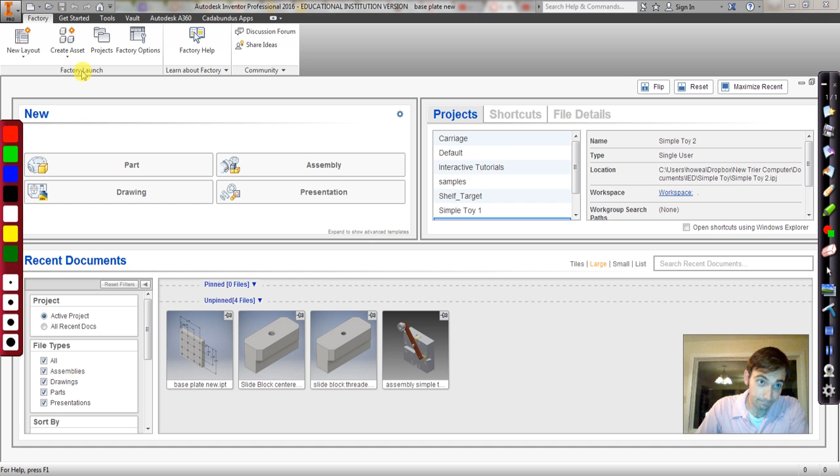Okay, now we want to make the assembly. It's exciting. We're going to click on New, and this time we're going to do standard.iam.

So this is a little bit different than maybe what we've seen. First thing we're going to do is place, which just means we're going to bring in a part. If you have your project set up right, it should take you right to your Simple Toy folder.

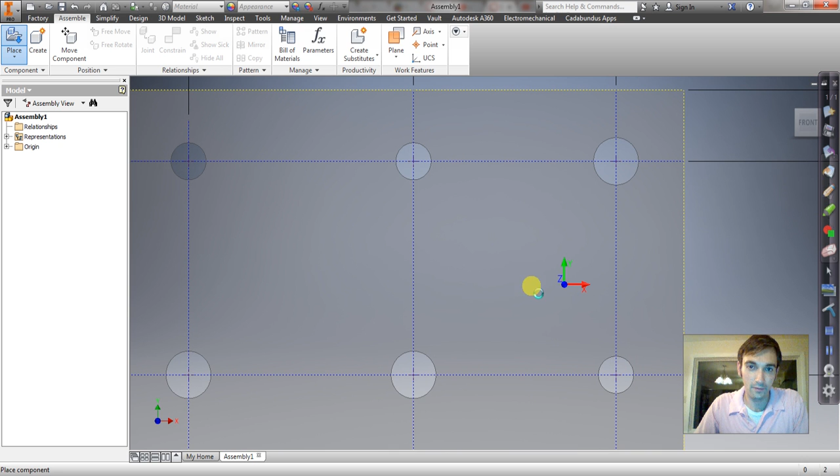First part I'm going to place is the base plate, because that's kind of like our base part. It's not going to move. So I'll say OK, click to place one part, then hit Escape. There we have our base plate.

Next thing we're going to do is place our corner guide blocks. So I'll say place corner guide block. I need 4 of these, so click, click, click, click, and then right click and say OK. Now we're going to use our mating conditions.

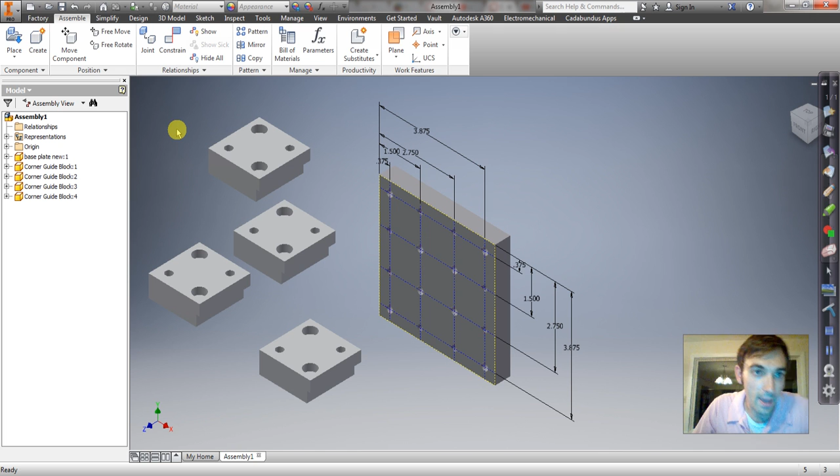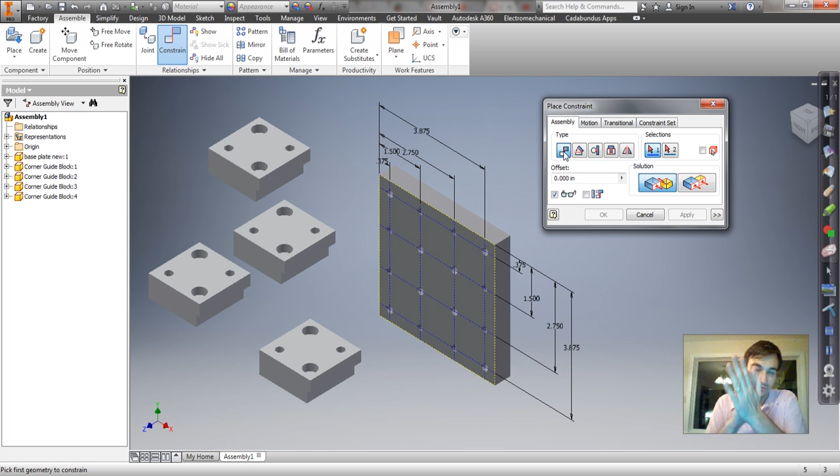So what you do is click on Constrain, not Joint - I actually don't know what Joint does. We're going to say Constraint, and then say Mate. Mate puts 2 surfaces together, so they can move any way they want as long as they're together.

Let's rotate a little bit. Click the base there and that surface there, and it'll put those 2 surfaces together. Then we can say Apply. Notice that this corner guide block can still move in all the other 2 dimensions, because it's still satisfying that mating condition.

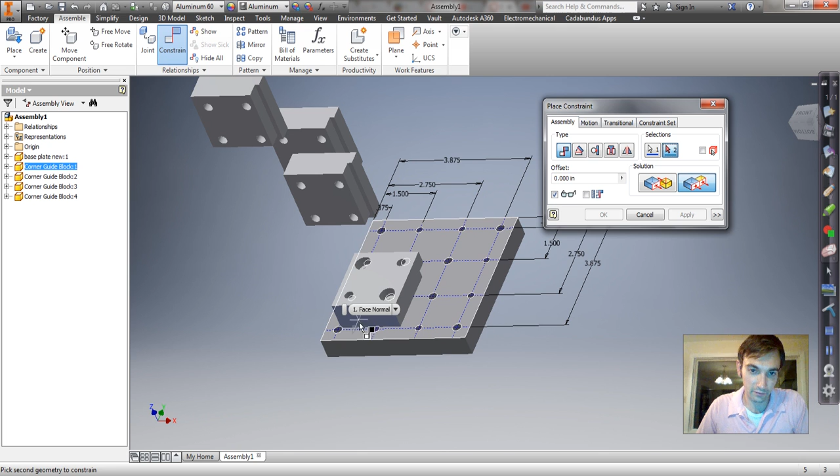So maybe we'll put this corner guide block right in this corner. The mating condition we can use is called Flush. It's still under the mate type of constraint, but it's called flush because it aligns 2 surfaces. So I'm going to align this surface and this surface, and then align this surface and this surface. So this one is now locked in place.

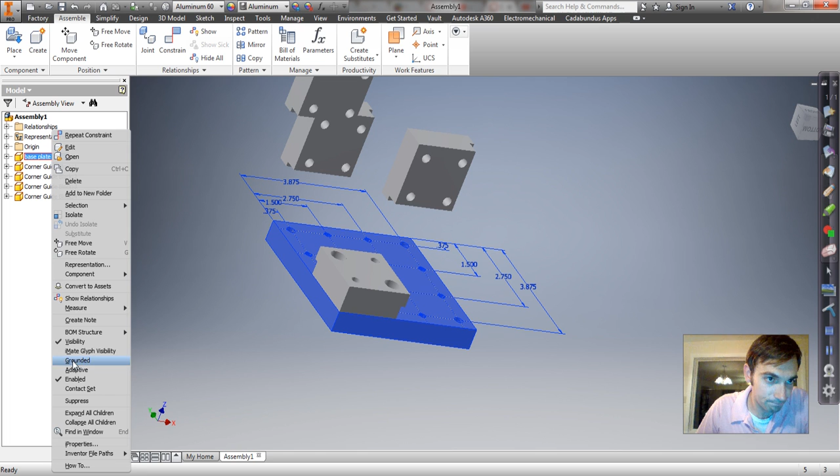By the way, I can right click on my base plate in the model viewer - in the model tree or something, it's late right now and I forget the name - and click Grounded. So that one's grounded, so it can't move. Now the base plate is grounded.

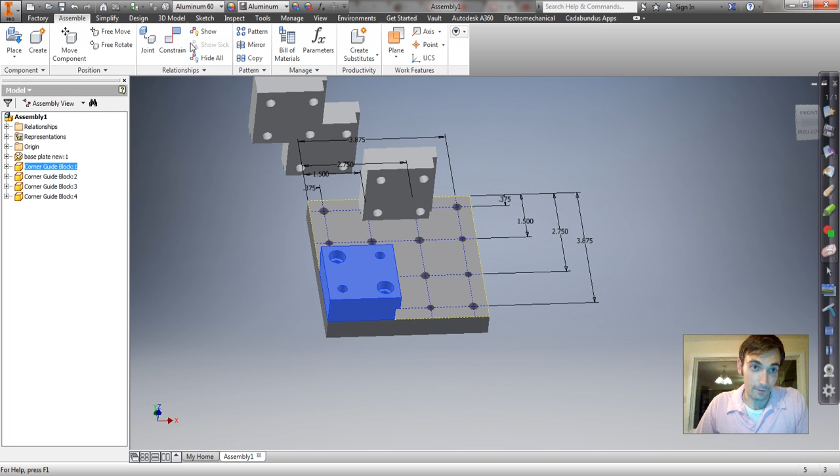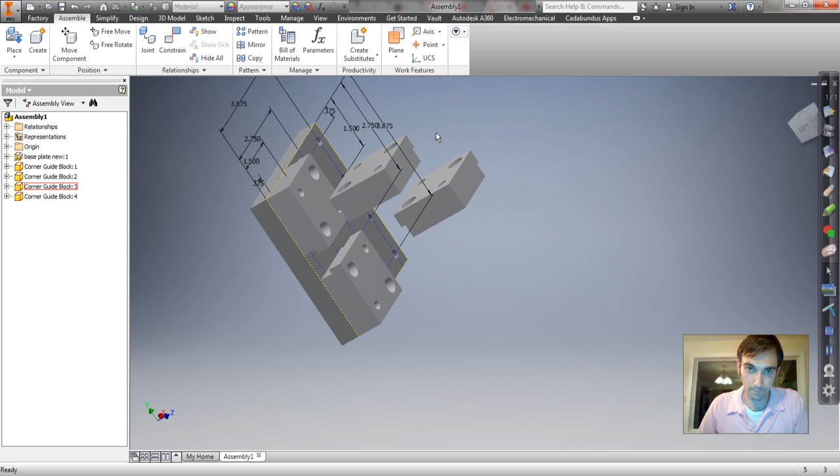So I'll just go through and do the rest of these now. Constrain, boom, boom. Maybe we'll put this one in that top corner. I'll apply that one. This may want to be to here and here. Apply. And then I want it to be from here to here and here. Apply. Done. Constrain the next one.

Put this one down. Apply. Make this face flush to, I think, that one. Make this face flush to that one. Good. Next thing we'll do, make that surface to that surface.

I made a mistake, need to cancel it. Make this one to that one. Then - whoops, sorry, I need to apply it first. Then I'm going to make flush.

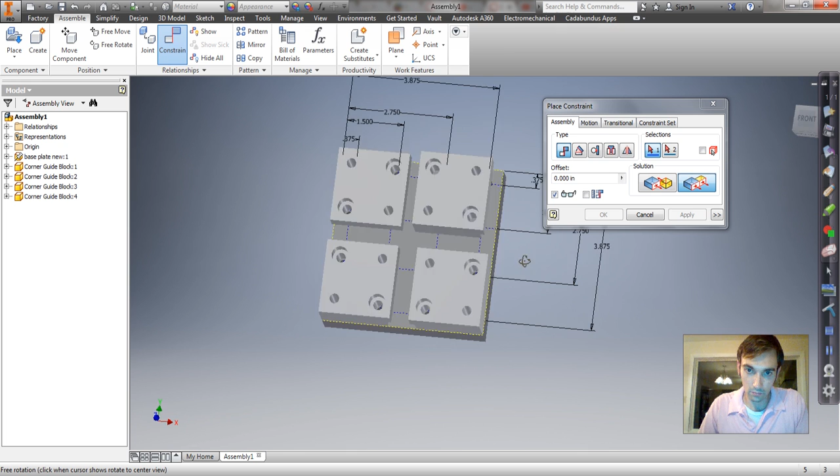Wait a minute now. I think I want to make this face flush to that face. Apply. And that face flush to that face. Apply. Good, we got the corner guide blocks in.

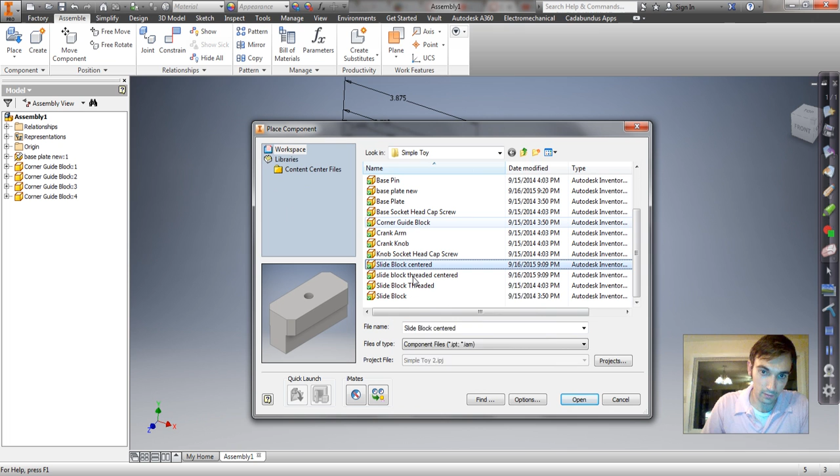Maybe next thing we'll do is the slide blocks. So we're going to go to Place, and then Slide Block. Okay, so since I want this one to be right in the middle, I'm going to activate a middle plane in the slide block and a middle plane in the base plate.

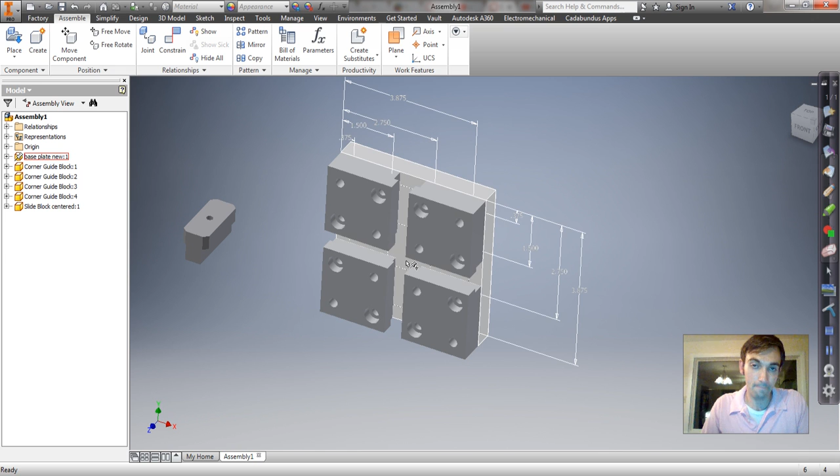How do we do that? I'm going to do the base plate first. So double click on the base plate, then click on Origin, and hover over these existing planes.

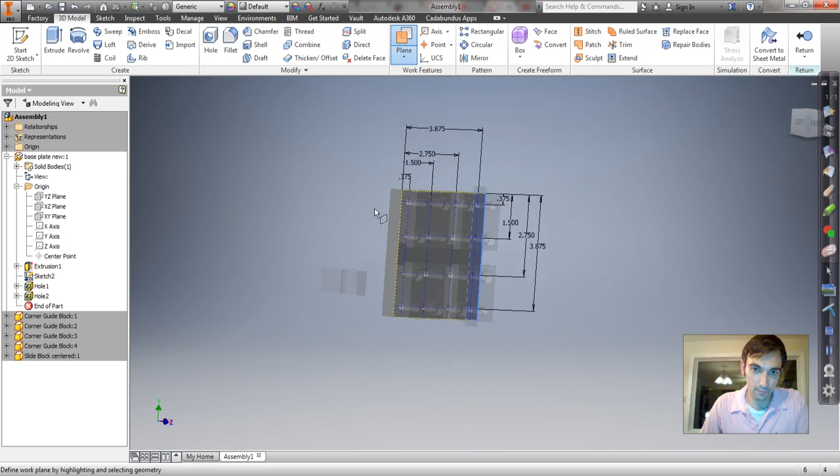There isn't a plane that goes right through the middle, unfortunately, but we can make one pretty easily. Click on plane, then click one side, and then the other side. That's going to place a plane right in the middle. While we're at it, let's go ahead and put one in the other middle.

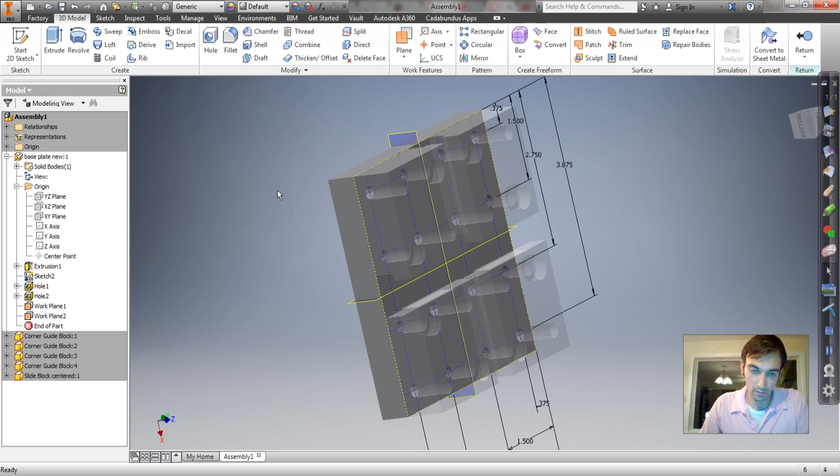Oops, gotta click plane again. Wait a minute, I'm having trouble - maybe that side was already selected. So now I have two planes that go through the middle and they're perpendicular to each other.

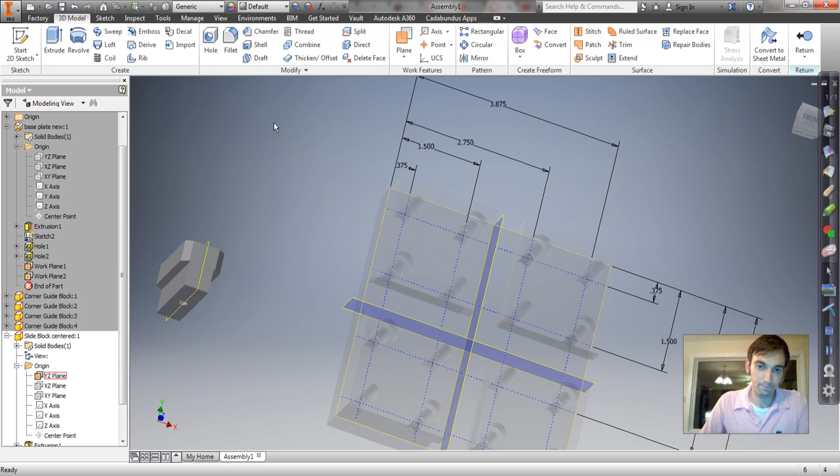Now I'm going to say return to go back to the assembly. Now I'm going to make a center plane in this part, the slide block. Double click that one, go to the origin in that one. Now I created this part in a way such that it already has the mid plane there, so I'm just going to right click on it and make it visible. Okay, now I can return back to the assembly.

I can constrain this mid plane to that mid plane. I think I actually clicked on a point by accident, so I'm just going to cancel and try again. That plane to that plane, and apply. And I'm going to put this face down on that face.

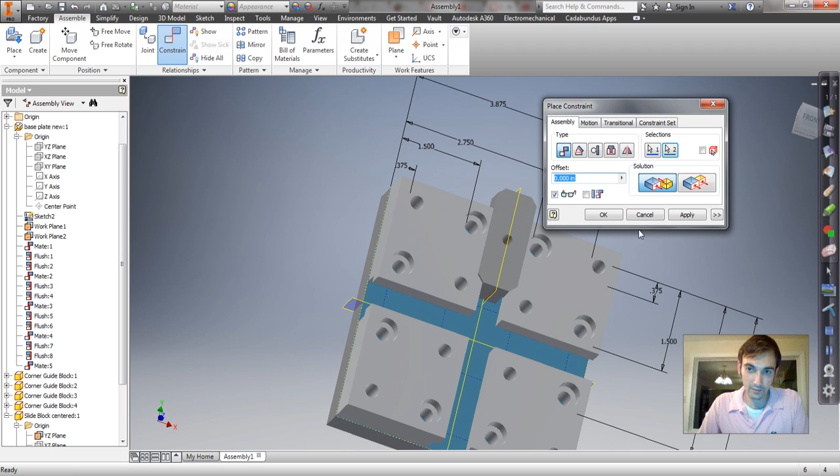Actually, it goes the other way, doesn't it? This is on the bottom. So it goes here, that goes on the bottom. And apply. Still want it to be able to move like that. So that one's actually finished.

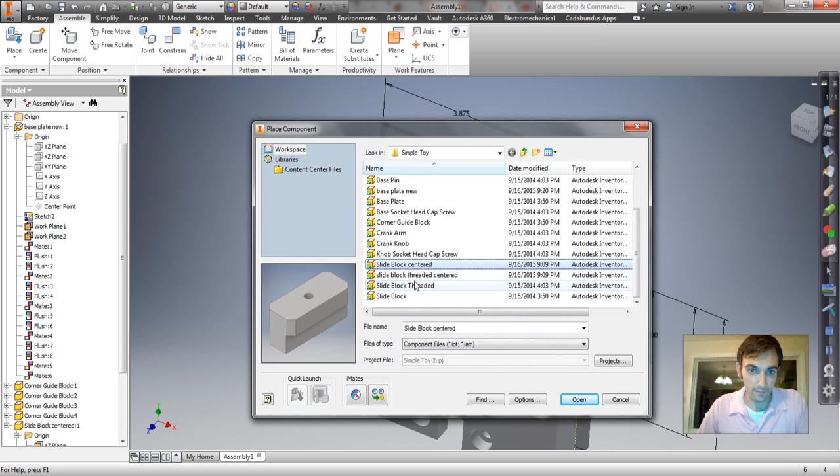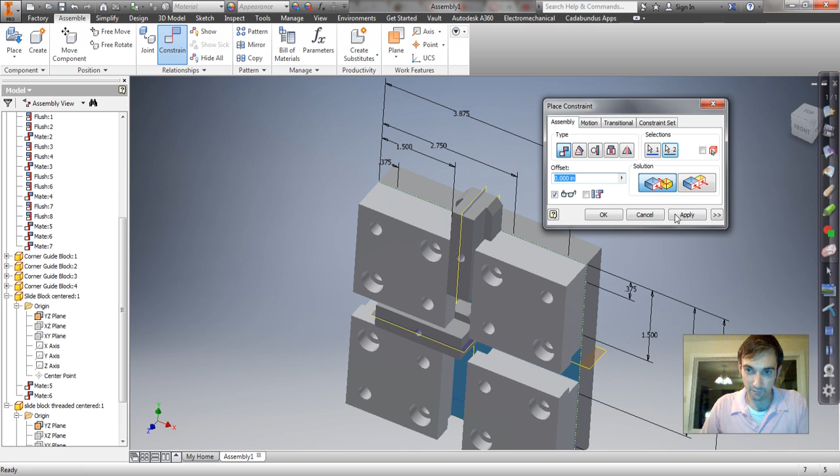Now we're going to put in the slide block threaded, which is the same procedure exactly. Double click on that part, make that center plane visible, go back to the assembly, click constrain, constrain that plane to this plane so that they're mated, and then constrain this face to that face so that they're mated. And now this one can move as well.

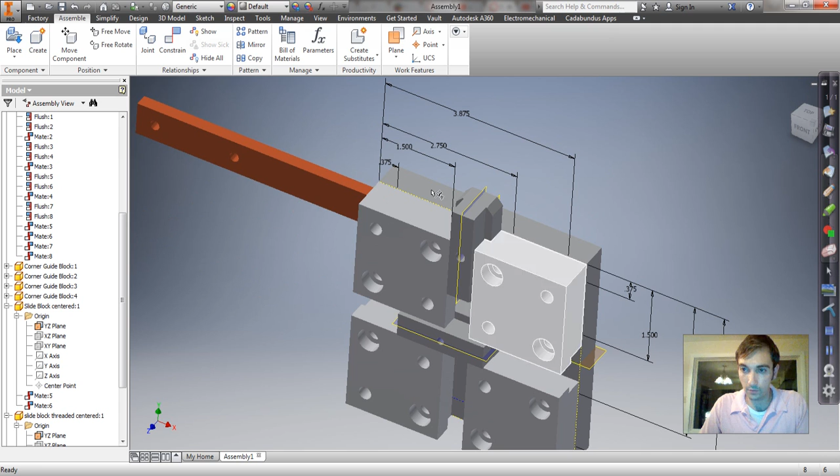Okay, next thing we want to do. Why don't we put the crank arm in? So what we're going to do is we're going to place the crank arm. Place it in the part. So now we're going to mate the crank arm to the top of one of these corner guide blocks. So mate, mate. There, it's on there.

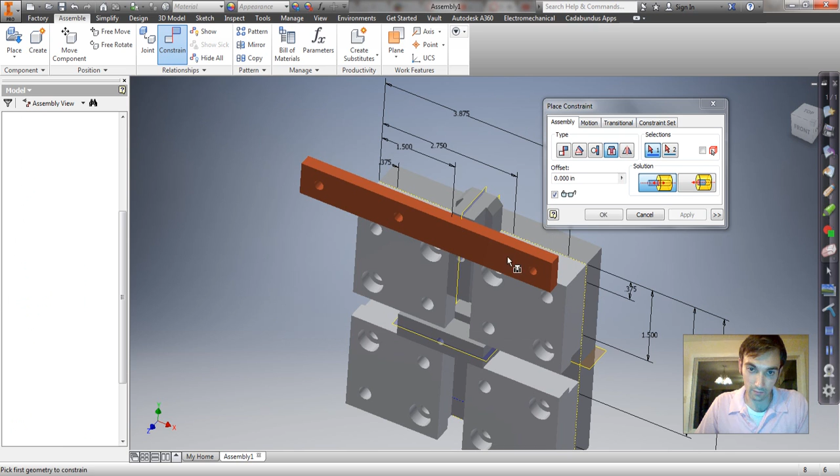I'm going to use a different mating condition called insert. If I click on the center of this hole and the center of this hole, hit apply, doesn't like it. Let me think about why that is. What I did was I picked the wrong side of the hole. So let's try that again. Go to insert. We're going to pick the bottom. You got to pick the bottom of that one and pick the top of this one. Okay. Do the same thing with the other one. Pick the bottom of it and then pick the top of it.

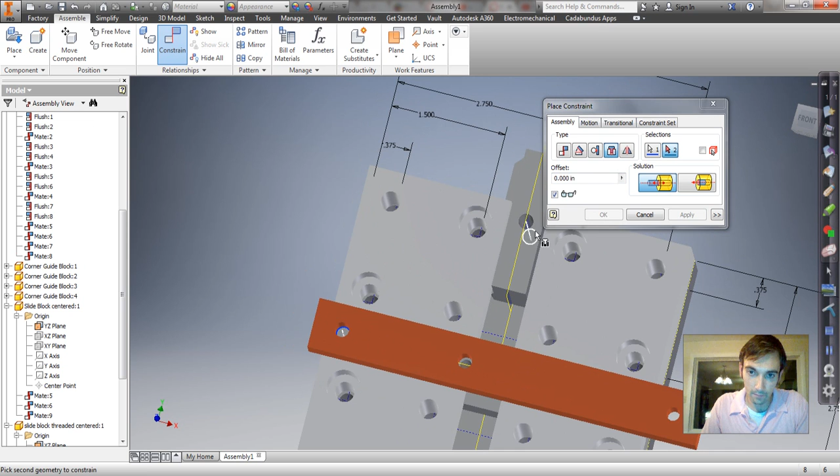Apply. Cancel. And now this is where it's kind of neat, is that they actually all move together. All the mating conditions are being solved for all those different points, and you actually get some movement, which is pretty neat.

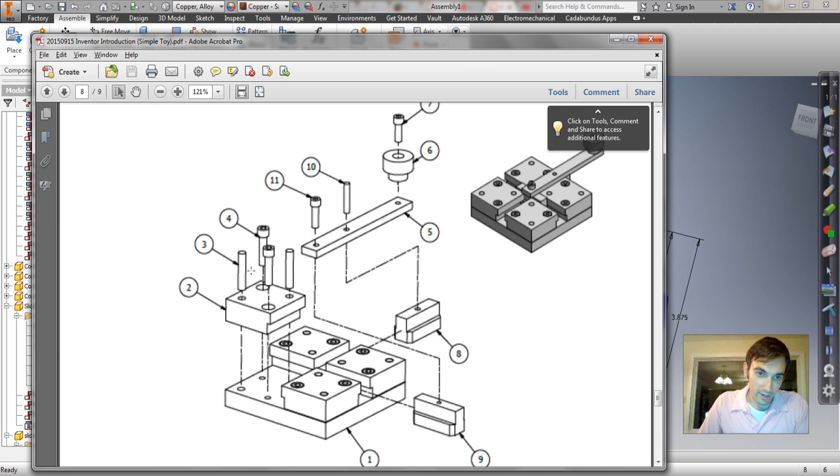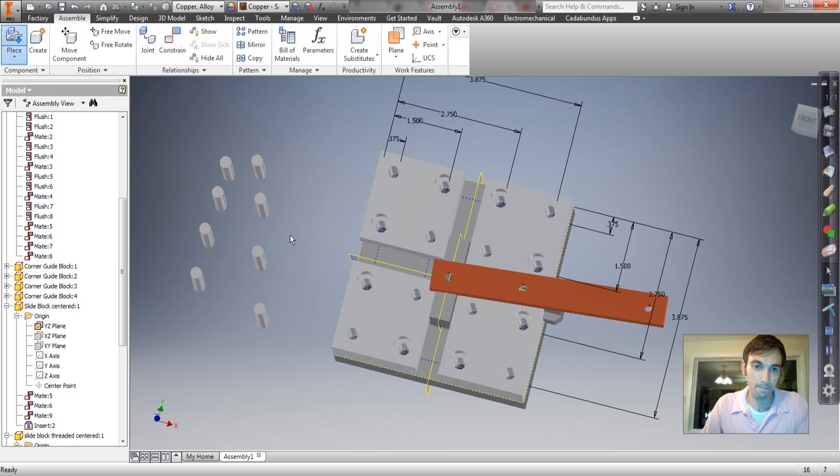Okay, now we're going to add the rest of these parts here. Let's go ahead and add these pins. So I'm looking on the assembly drawing, that's balloon 3, which is item 3, that's the base pin. So I'm going to go here, say place, base pin, and we have 1, 2, 3, 4, 5, 6, 7, 8 of them. Go to constrain. This is the same thing, insert. Just use insert. Boom, boom. Might have to flip it around.

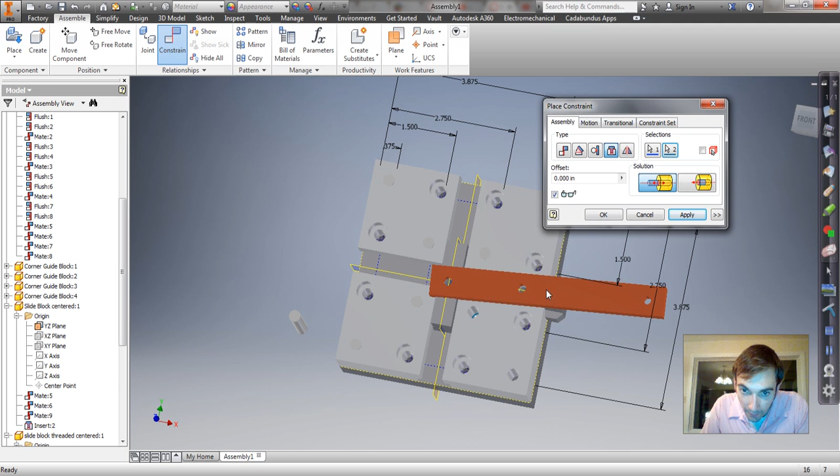Insert this one. That one actually went in fine. Insert the next one. Insert the next one. Just get all these in. Okay, that one I actually messed up, so I gotta try it again. Clicked the wrong side of the hole. So insert there to there, and insert there to there.

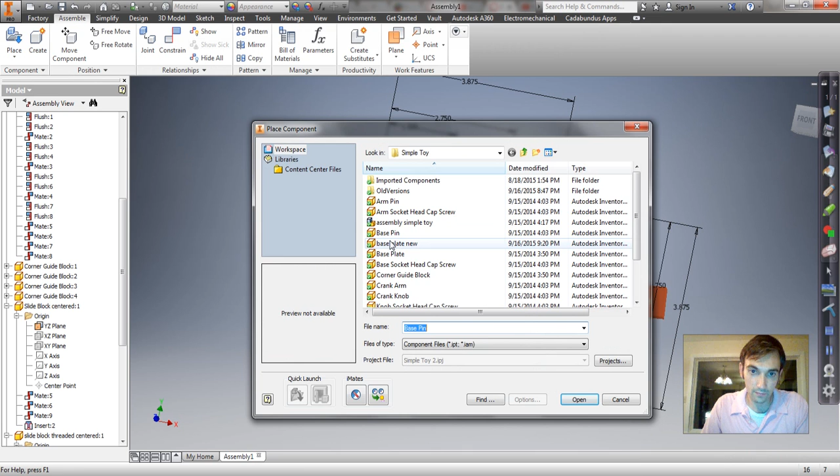Okay, let's put in balloon number 4, base socket head cap screw. So we're going to place the base socket head cap screw, and we need 8 of them. 1, 2, 3, 4, 5, 6, 7, 8. So we're going to use insert again. So constrain, insert, there to there. So it's important here now you're picking the bottom of the screw head and the bottom of the counter bore hole. Apply.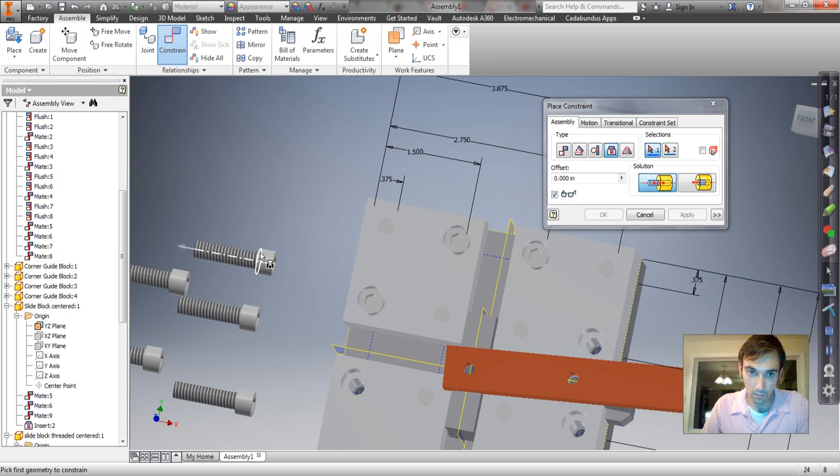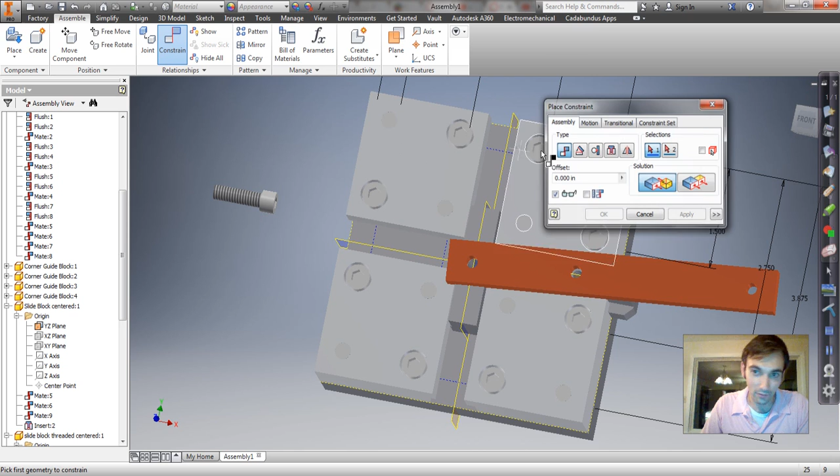Okay, good. Next thing we want to do is add in number 11. That's the arm socket head cap screw. It's a good name for it. Arm socket head cap screw. We just need one of those. Go to constrain. Insert the bottom of this one to the, which one was my slide block threaded? I forgot. It is the other one. So I'm going to go to insert right there. Apply.

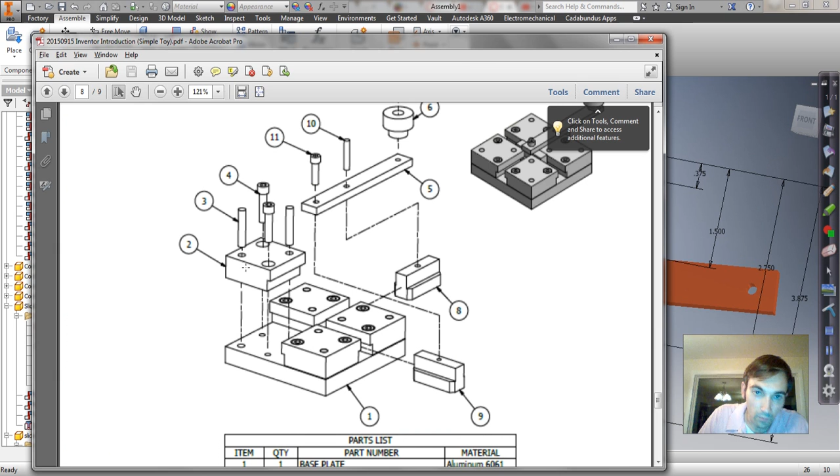Then we'll get the arm pin. So we'll say place. Arm pin. Constrain. Going to insert top to the top. Flip it around. Okay. What's next? Crank knob. Place the crank knob. We're going to constrain. Just use insert again. That's really the easiest way.

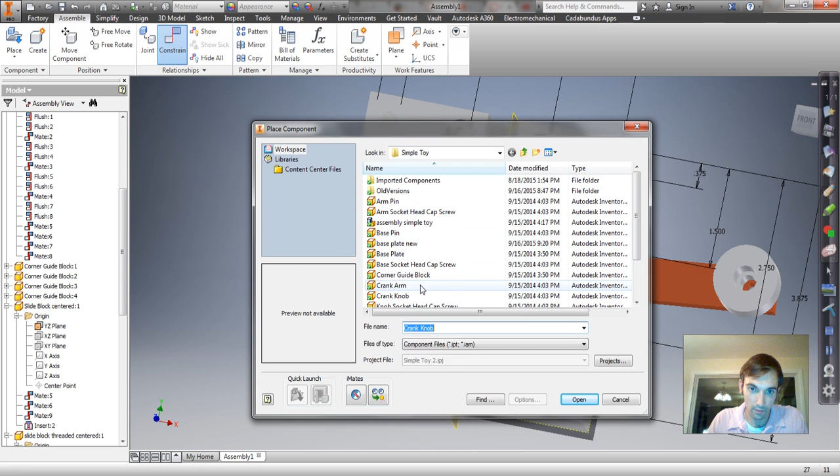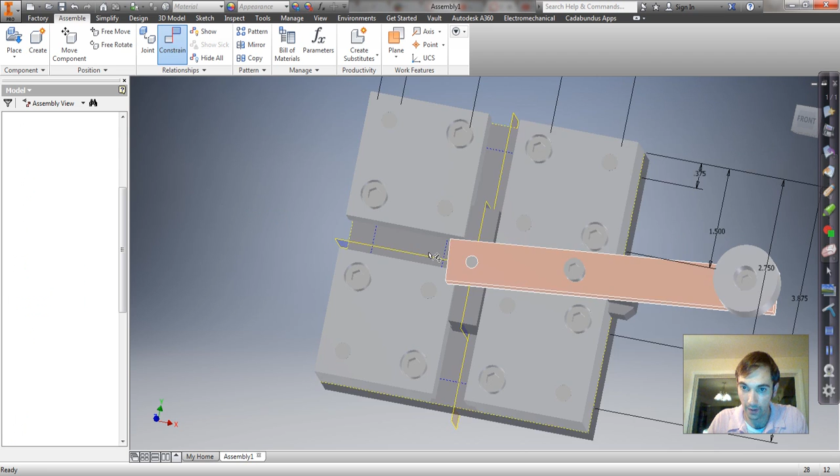Put there, apply, and now we need the, what screw is it? Whoops. It's number 7, which is the knob socket head cap screw. Okay. Constrain, insert, bottom of the head to the bottom of the counter bore hole, hit apply, and then cancel. And then you're done. And then hopefully we can get some movement out of here. So, kind of neat. Cool. Make sure to save.